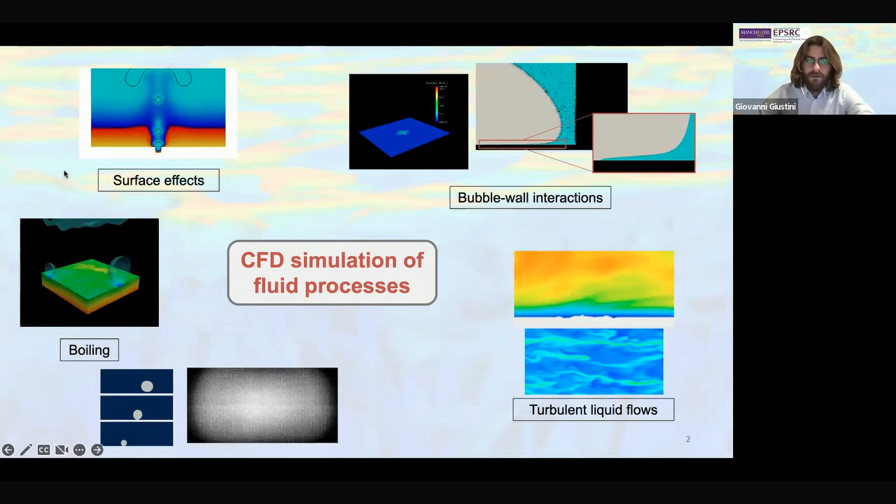So let me break down today's topic. First of all, I'd like to give you a bit of context and motivation behind my research and talk about the bigger picture of this kind of CFD modeling of boiling, especially as far as the energy sector is concerned. Then I'd like to show some results from my career so far.

Both are pertinent to the modeling of nucleate boiling phenomena, both during bubble growth and the formation of some liquid films beneath steam bubbles growing at a wall, but also some contribution in the area of boiling heat transfer.

And after that, there is going to be what, at least personally, I think is going to be the most interesting part of my talk, because I will show something that isn't really finished. Hopefully that will be a good opportunity for discussion. And eventually some very preliminary conclusions and the wrap up of our chat.

Now, boiling phenomena, as we know, are an integral part of energy systems. You just need to look at nuclear power plants, but in general, any power generation technology. Now that is rather clear to us in the multi-phase flow community, but outside of it, this isn't really appreciated. So a lot of academics coming from different backgrounds and doing different research, but still, for example, in energy systems, don't really appreciate the importance of boiling.

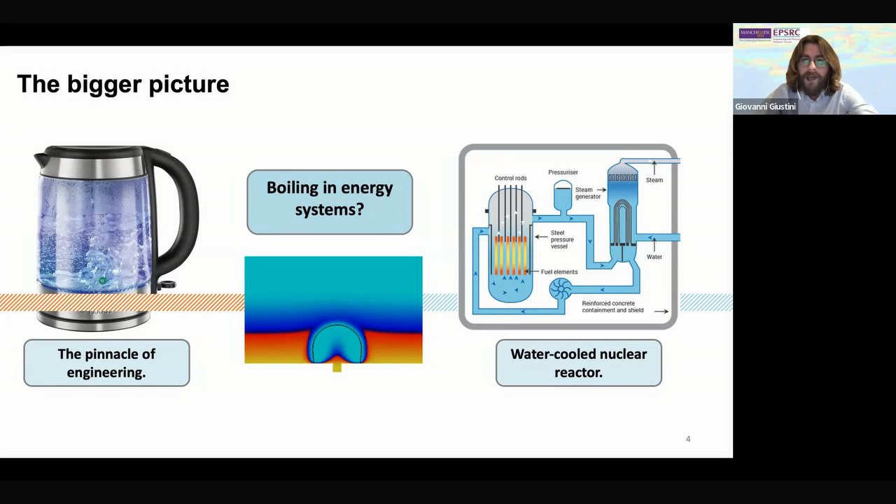So if we stick to nuclear, okay, maybe some nuclear people in the audience, yeah, okay, fine, but so why boiling in nuclear? Most of the reactors currently operating in the world are pressurized water reactors, PWR or PWRs. A PWR core works perfectly well with relatively fresh, not boiling, single-phase liquid water.

Well, yeah, in principle, yes. In practice, there is some boiling in a PWR core as well. No net vapor generation, but there is definitely boiling, and rather vigorous boiling, in the hot channel of a PWR.

And yet again, one may say, okay, fine, nuclear power, especially pressurized water reactor technology, has been around for ages, say 70 years, and we have been doing that without seemingly knowing anything about boiling. Safety seems to be guaranteed.

Well, yeah, that's exactly the problem. Safety seems to be guaranteed, but at what cost? So 70 years of increasingly expensive nuclear power, at least in the West. So the idea is that, okay, fine, one way to look at it is that maybe there is a lack of fundamental knowledge of the basic fluid processes, whether it's kettle boiling or nuclear reactor boiling - it's the same, still not very well understood. That is one of the causes of significant conservatism in analysis and design.

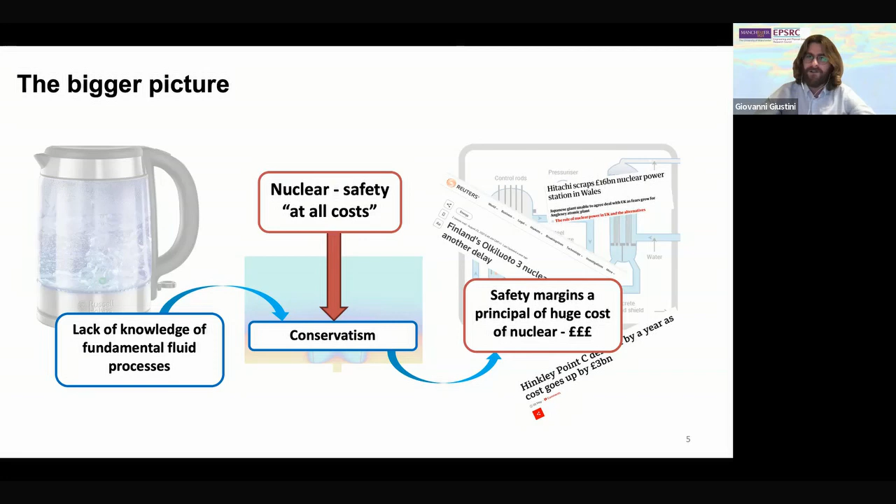So maybe it's not really boiling, maybe it's some other kind of consideration. Okay, that may be, but I'm a multi-phase guy, I do boiling. I think this rationale seems at least a plausible excuse to do some good science.

So what kind of good science do we want to do? My specialty is numerical simulation using techniques based on computational fluid dynamics. This is a high-profile research effort funded both by the UK taxpayer, via the Engineering and Physical Sciences Research Council, and by sponsors such as my main industry sponsor, Rolls-Royce Nuclear. The idea is that we combine very detailed, physically based fundamental simulation with experiments for verification and validation.

This gives us a good understanding of the basic processes involved in boiling: bubble growth, bubble departure, bubble rise, boiling heat transfer, and so on. With a combination of these two aspects, we can generate a decent amount of data to train the next generation of data-driven modeling for more accurate analysis - not really at the small scale of single bubbles, but more at the component scale, for example a nuclear fuel channel, or at the system scale of the core itself and the rest of the plant.

So the idea is that, as a consequence of all this number crunching and modeling of little bubbles, there would be a technological breakthrough enabling us to quantify fundamental fluid processes - not just boiling, but also single phase flow, turbulent heat transfer, and so on. So we generate and assimilate a sizable amount of high quality simulation data.

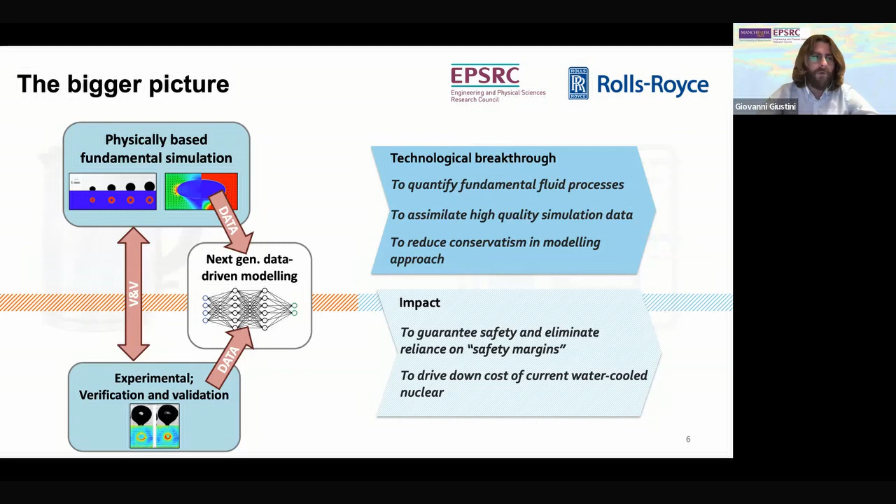Then, in other parts of the world, there are other considerations, and maybe this rationale wouldn't really apply. Now, where are we? We have an excuse to do something that I believe is interesting and can be, at the end of the day, an advancement of the state of the art in multi-phase flow and boiling.

What kind of weapons do we use to tackle these huge problems and fulfill this promise of learning a lot about boiling, especially in a nuclear context, and driving down the cost of nuclear? The kind of CFD that I use is maybe not the usual CFD we're accustomed to - I use interface resolving techniques for two-phase flow, called interface capturing methods.

The basic idea is that with these methods, we want to model the transition region between two fluids and approximate it on a finite volume numerical grid. For example, the interface can be the curved surface of a bubble growing at a heated wall. This is the methodology that underpins the physically based fundamental simulation that me and my coworkers use.

Now, these interface capturing methods are coupled with the ordinary CFD simulation methodology, the same that we use for flow of water in a pipe, an aerofoil, a Formula One car, and so on.

With this interface capturing, we can detect where the two phases, for example vapor and liquid, are, and what the interface is doing through time. As we can see from the image of this triangular mesh at the center of my slide, all the action is really in only a few cells where my liquid changes into vapor. So from the point of view of continuum mechanics, it's a waste, really.

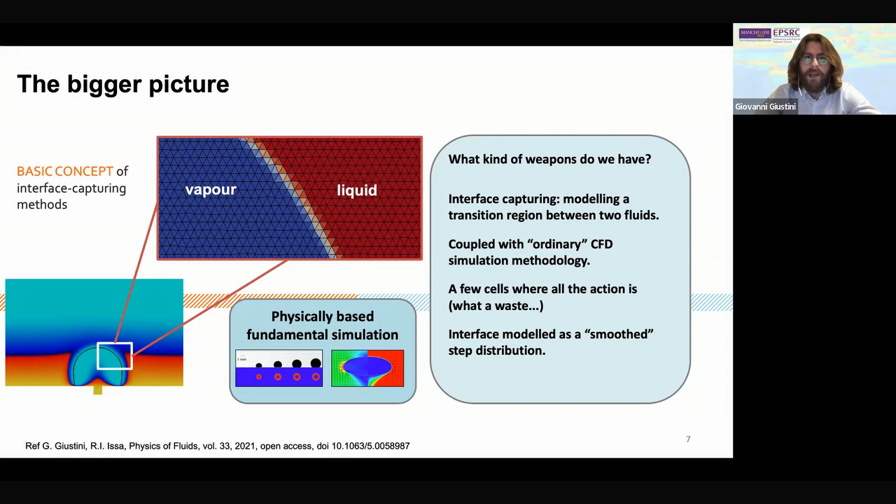I would like to start with the so-called micro layers. We would normally expect that in boiling of water at atmospheric pressure, the solid surface exposed to the vapor is exposed to the vapor inside the bubble. That's what we would expect. Well, things are not really this straightforward.

These images are from my coworkers in Korea, the group of Professor Hyungdae Kim. Here we're looking at a single bubble growing at a heated surface. The top row of images is the side view of the bubble, and the other two rows need a bit more interpretation.

The middle row of images represents an interferometric detection of liquid beneath the bubble. So there seems to be a liquid film beneath the bubble that, when we use interferometric measurement techniques, shows us an interference pattern, some fringes. This is at least what appears to be from experimental measurement.

Actually, some other measurements from the lab, the last row of images, this is an infrared measurement of the temperature distribution at the solid surface beneath the bubble. Red means hot, and then from yellow to green to blue, increasingly cold surface. Now there seems to be something.

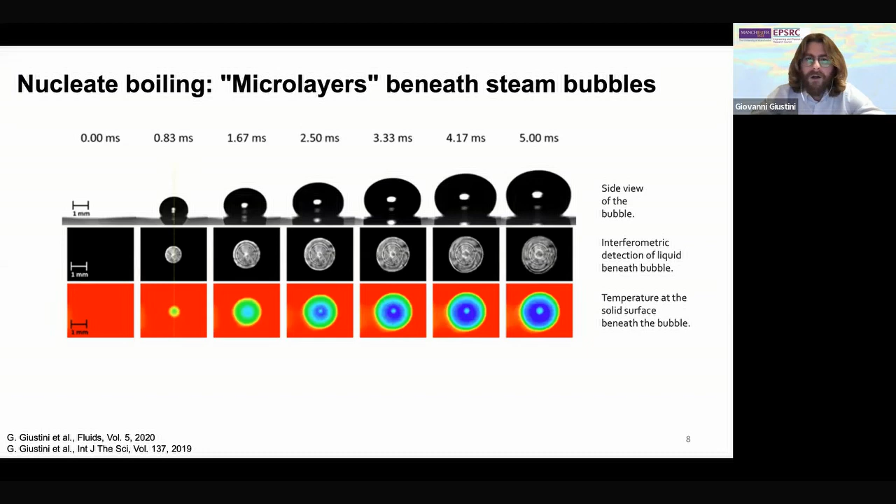There seems to be maybe some entity, possibly a liquid layer, or in any event something that is evaporating. We are relatively confident that what is evaporating is a very thin layer of liquid, the micro layer, that is left behind on the solid surface during the early stages of bubble growth, and then starts to evaporate, and eventually, when the bubble has grown up later on, disappears. But we'll get there in due course.

This is a sketch of what is likely to be the typical shape of a microlayer beneath a steam bubble. This is what we would see if we were some kind of Laplace demon sitting on the solid surface. Actually, we generated this image with computational fluid dynamics.

The important point to bear in mind is that these layers seem to be really, really thin. They are something like 5 microns in thickness, but they extend radially outwards from the center of the bubble base up to a few millimeters, so extremely shallow.

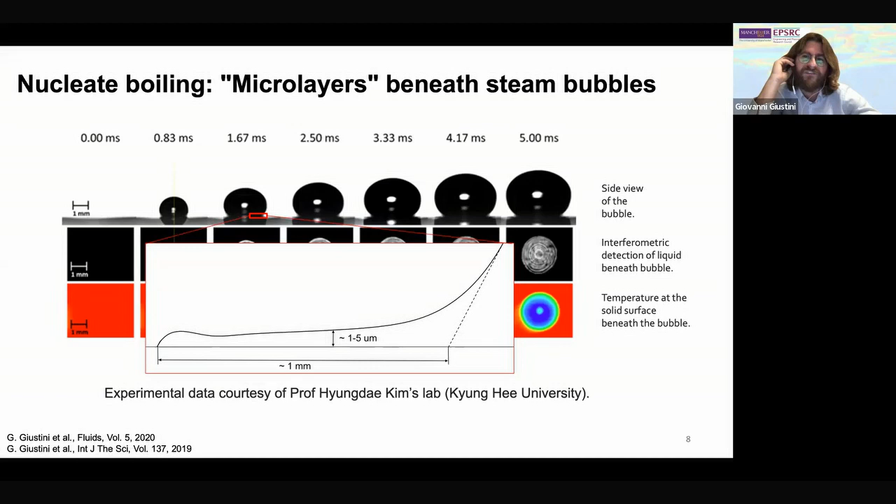This technique was pioneered at MIT using computational tools conceived for research. So me and coworkers, formerly at Imperial and now at the University of Manchester, are using a similar methodology, but implemented in more broadly applicable CFD toolboxes.

In these videos, we are seeing results of a hydrodynamic simulation of microlayer formation. The blue is the liquid, the white is the bubble, that is to say, the vapor. In the bigger video, I have included some arrows that represent velocity vectors at the interface and in the liquid, and the close-up represents the hydrodynamic process of microlayer formation from a qualitative point of view.

The important point here is that at the base of the bubble, there is indeed a point where the liquid ends and the vapor begins, if you can see my hand or arrow here. That's the inner root region of the microlayer. That is what in the academic community we call the triple contact line.

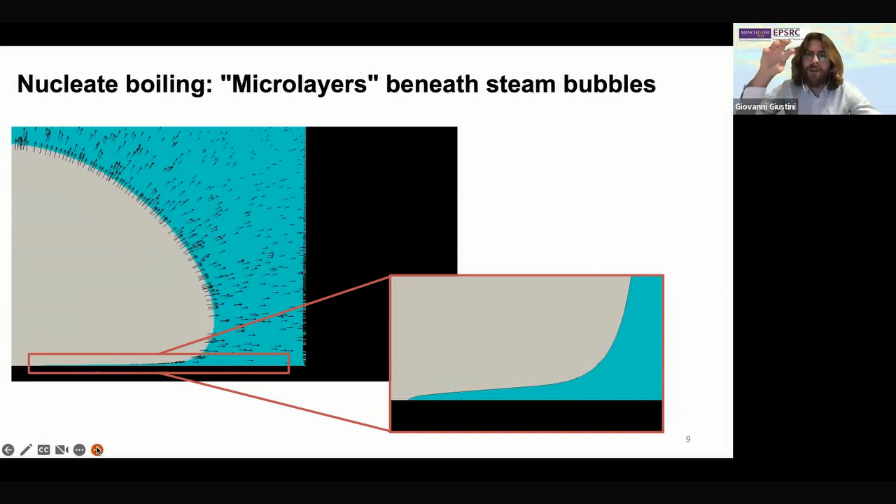With this trick of inflating a bubble artificially and then looking at the hydrodynamics, we can actually get some decent results when compared against the experiment, at least during the early stages of bubble growth.

So the idea is that we studied the hydrodynamics because we believe that the hydrodynamics-only simulation of a microlayer is representative of a very early stage during bubble growth, during which the layer hasn't had time to evaporate due to the transport of heat from the solid surface.

And here, just an example of the results that we can get. These two plots have been plotted at two different times into the simulation. The various lines are simulation results, and the black hollow squares are experimental data from Professor Kim's lab. And qualitatively, the agreement seems to be all right.

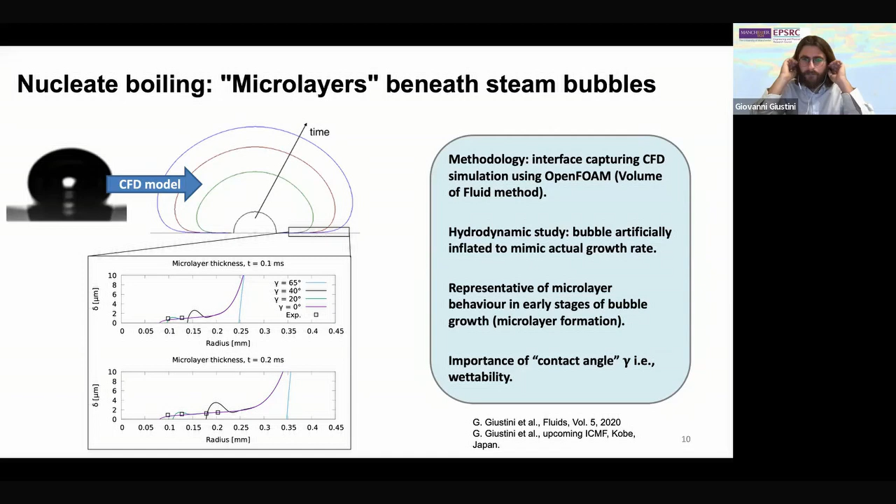Later on during bubble growth, of course, we know that a bubble grows at the surface during boiling, but eventually departs and goes into the liquid. And if we're looking at convective boiling, it is then advected away into the flow. Anyway, so the microlayer is not all that there is to say about boiling.

And there is another topic that I find particularly interesting, and I'm glad to be presenting some results to you about it. And that is the study of boiling heat transfer at bubble departure. So once the microlayer has formed, it has then evaporated, it's gone, it's disappeared. Well, there is still some time left in the life of a bubble before it departs from a surface.

Now, I like to call this the Griffith problem, in memoriam of the late Professor Griffith from MIT, who was the first to introduce and study the problem. And the idea is that we want to study what happens when a bubble departs in terms of quantifying the flow of heat to cold fluid attendant upon bubble departure.

And here the idea is that what we have at the surface is that first we have a bubble, then due to gravity, the bubble disappears from the surface, but the volume of space previously occupied by the bubble due to continuity needs to be replaced by something. And this something is the surrounding liquid.

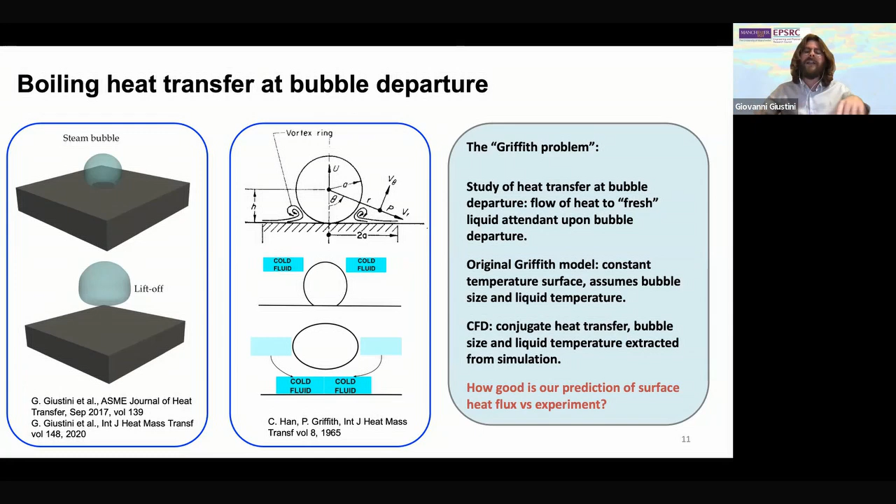And this is more or less what we get for this kind of problem. So this is a study both with CFD and with experiment of bubble growth and departure during pool boiling of water, in this case at atmospheric pressure.

Again, three rows of images. Top row is a side view of the bubble as modeled with CFD. Middle row is phase distribution on the heat transfer surface from CFD. The red ring is where basically the microlayer is before it evaporates.

Too long to go into details, but in this particular simulation, we are not really resolving the microlayer with a computational grid. There is an algebraic offline model that takes care of it. But the bottom line is that once this model decides that there is no more microlayer, then the behavior of the bubble at its base is handed over back to the CFD, so it's again fully resolved by the computational grid and fully mechanistic.

The last row of images is again the interferometric measurement, from our colleagues from Korea, that shows initially a fringe pattern, so presence of the liquid, but eventually the disappearance of the liquid.

So after the vertical solid line, what both experiment and CFD simulation tell us is that at the base of the bubble, there is a broadly circular area of solid surface which is exposed to the vapor in the interior of the bubble. And as the bubble is departing, this approximately circular dry patch is shrinking, and as it does so, there is an advancing liquid front that re-wets the previously dry patch, likely giving rise to heat transfer from the solid surface to the fluid.

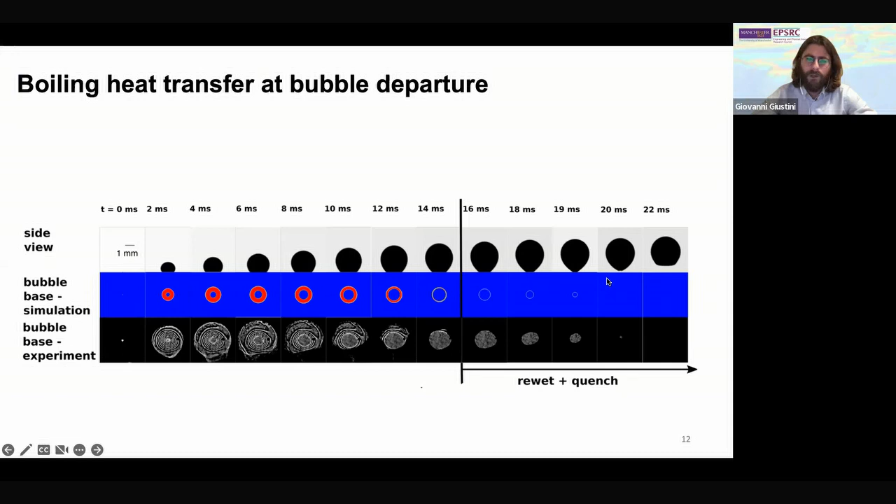And again, from the lab, we do indeed have direct measurements of the heat flux, of the planar distribution of the heat flux at the solid surface beneath the bubble, without going into details about the experimental technique used by our colleagues.

The bottom line is that from direct measurements of the temperature of the solid surface, we can actually reconstruct the corresponding heat flux on the solid side of the heated surface, and from that we can extract radial or transversal profiles of the heat flux at the solid surface, looking at the images on the left, both during this liquid re-wet process and also during the subsequent post-departure quenching process.

And give or take, what happens is that the magnitude of the flow of heat can be initially quite considerable. We have something like 150 kilowatts per square meter, which is not as bad a heat flux, which then decreases with time.

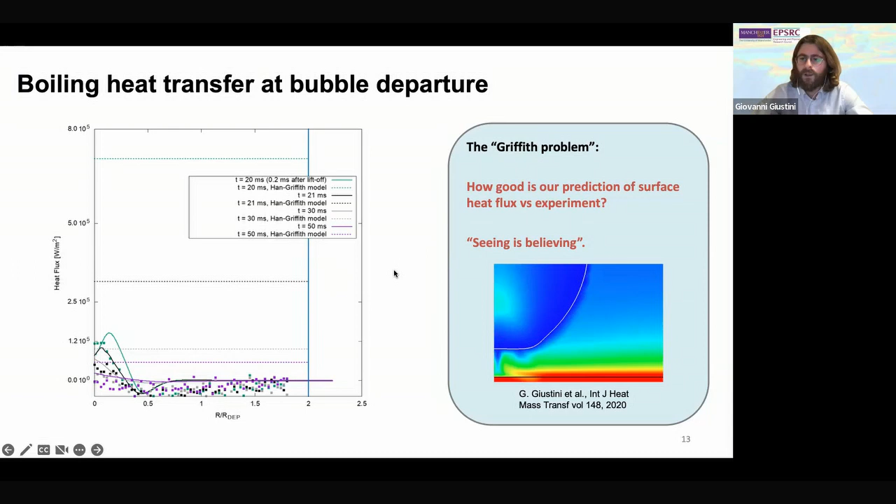So qualitative physical phenomena originally postulated with a pen and paper analytical heat transfer model could be confirmed with CFD, which to my mind is a rather compelling evidence of the power of present-day CFD with interface capturing in tackling these kinds of problems. Now, these are not the only problems that we are looking at.

There are other activities going on, and I'm beginning to realize that I do not have much time, so I'm going to rush, but I hope that I won't leave out too many important details.

Now, another open challenge in modeling that I'm very interested in is that of microlayer evaporation. So let's recap a little bit what's the situation right now. From a modeling standpoint, thanks to a sustained effort over quite a few years, I mentioned earlier work at MIT, but the problem was tackled also by some colleagues of mine at Imperial College London.

So the thing is that the microlayer is evaporating more or less as it forms. It also evaporates on a solid surface. And proof is the temperature distribution at the solid beneath the microlayer. So we have a ring-shaped temperature distribution with a cold ring-shaped solid region, which is suggestive that this layer is sucking heat from the surface because it's evaporating.

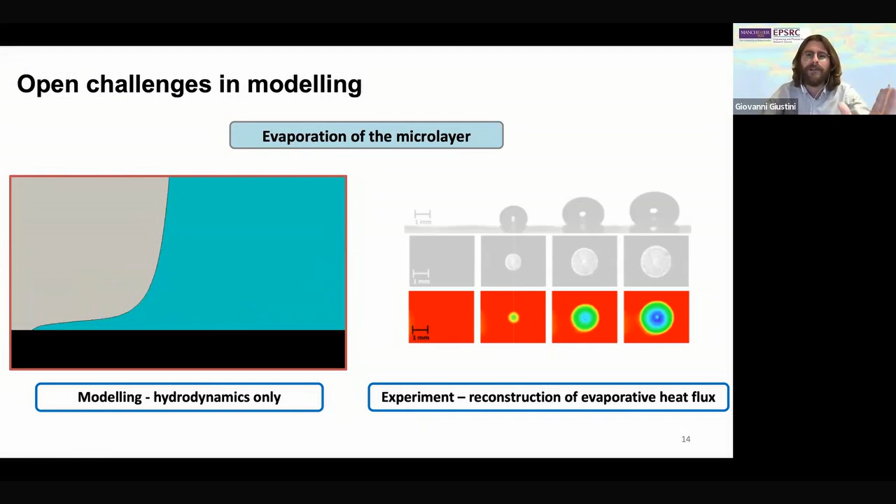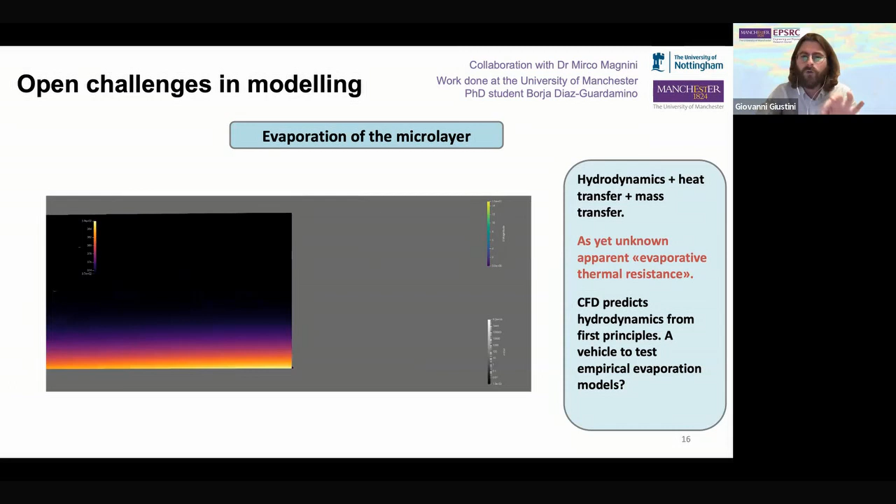By tracking, I mean that we can look at the bubble as it grows on the surface. We can model the hydrodynamics of the microlayer. So via tuning the various empirical constants that appear in our very approximate evaporation models, we can actually get a ballpark estimate of what are likely the evaporative heat transfer coefficients, both at the curved surface and at the microlayer, that give us good agreement with experiment. And that at least gives us some more indications of what could be the likely cause of the anomaly that we just saw in microlayer evaporation.

And so this is again a close-up of microlayer formation and evaporation using CFD. The black line is again the solid-fluid interface. So we're doing conjugate transfer. We are actually resolving the temperature distribution in the liquid around the bubble, but also in the layer itself and in the region where the layer is just beginning to appear.

So early days, and we're talking about simulations that, luckily, we can assume our bubbles are rotationally symmetric, so we can use two-dimensional axisymmetric simulation. Nevertheless, we have many cells, and due to some numerical restrictions on the values of the time step, we need to use very small time steps. So at the end of the day, these otherwise not too heavy CFD simulations are not so quick to run.

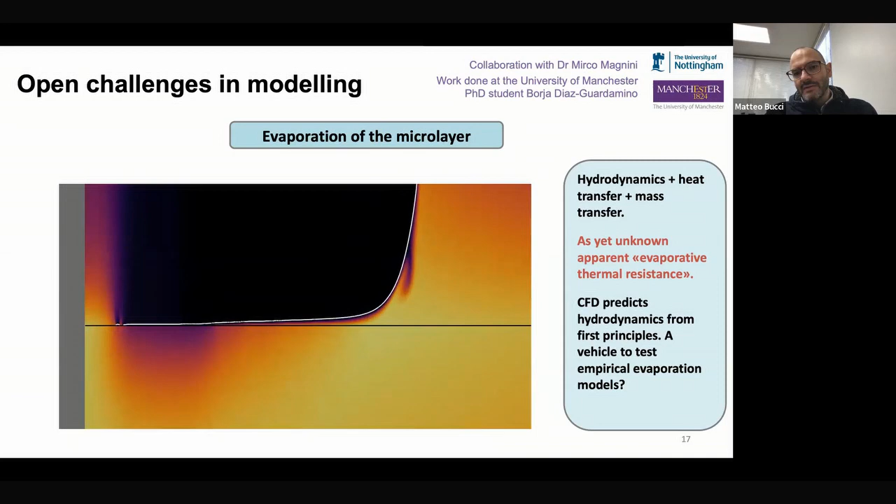Thanks, Matteo. Okay, another aspect we're looking at right now is actually flow boiling in subcooled conditions, when the liquid is a bit colder than saturation temperature. Here is work again in collaboration with Korea, and these are preliminary results. We are running CFD in conditions of a recent set of measurements where we are looking at single bubble behavior in flow boiling in subcooled conditions in a mini channel with X-ray. So here we can't see very well, but there is a little ghost of a bubble measured, and its appearance is detected with X-rays.

So here there are basically two research questions that we're after. First of all, we need correlations to capture evaporation at the surface of a bubble. But does the model that we have for evaporation work also for condensation? We don't know, we're trying to find out. And likewise, wettability and likely values of the contact angle of the surface seem to be again important in determining bubble behavior.

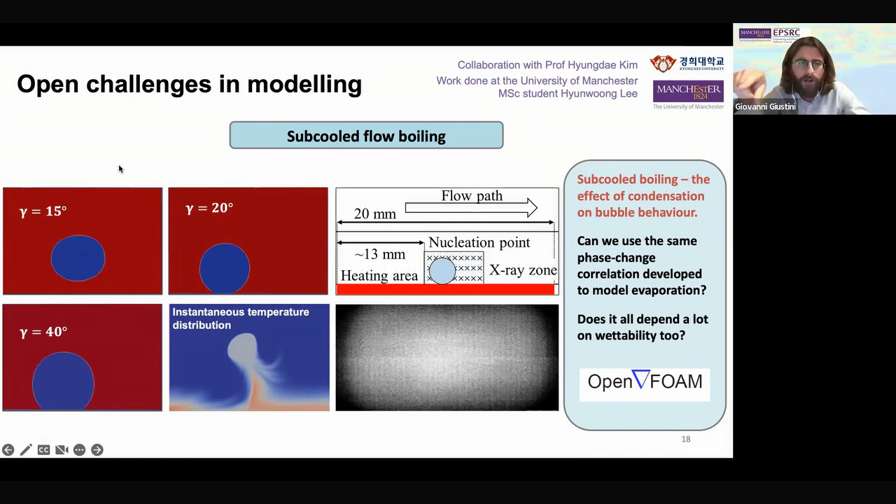And lastly, what we have seen so far is actually simulation on rather simple geometries, without taking into account surface features. However, we know that in boiling, surface features are important. There is this story that we need a cavity or a notch on a heated surface to initiate and sustain boiling at ordinary temperatures. Here, in reality, we are looking at bubble growth at cavities that are a bit larger than the cavities I just mentioned. I can't give the exact numerical details of what kind of cavities we are looking at, as there is involvement of an industrial sponsor in these kinds of projects.

But anyway, the bottom line is, let's take our interface-capturing CFD methodology and try to implement it in general applicable open source toolboxes such as OpenFOAM, so simulation on arbitrary meshes to tackle boiling problems on arbitrary geometries. So far we got to the stage where we could validate the methodology using standard test cases for free bubble growth and rise away from surfaces, and using the same CFD methodology, we then used it for bubble growth at a cavity or at a notch.

We got rather reassuring results in terms of bubble radius versus time for a rising bubble, provided that we use rather fine meshes. We're talking about millimetric bubbles, and we need to resolve everything with meshes with cells that are something like a few microns in size. So again, numerical challenges. And all this is to look at wall boiling in the presence of a surface structure.

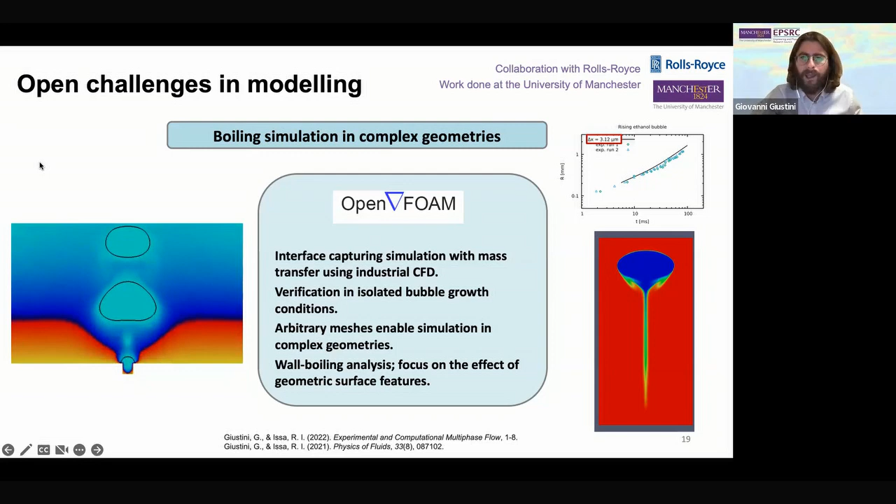And then with that, yeah, 45 minutes. I think I've been going on for long enough. Any questions?

Okay, I would summarize what I have just said in the following way. I hope that I have given an indication that we can use computational fluid dynamics to support industrial applications such as thermal hydraulics and boiling for nuclear power, industrial applications that rely on boiling. We can indeed model in detail key local physical phenomena during boiling at the surface. And for applications, we can explore the effect of parameters believed to be important in certain applications of boiling.

And here I made an example. We have an interest in surface structure for nuclear applications, and we use CFD for that. And with this, I shut up.

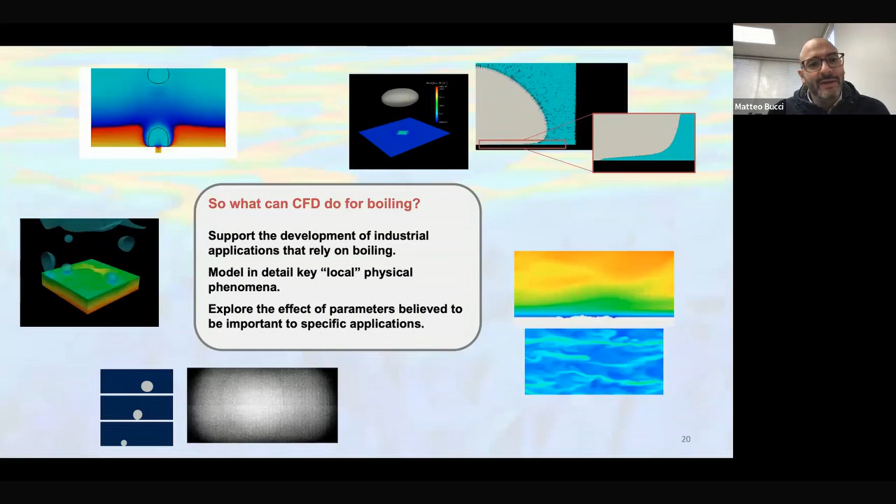Sorry, I'm a bit late. Delighted to take any questions. Thank you very much, Giovanni. Really insightful presentation, and I'll open up to questions. I see already that Saeed has his hands raised. I suppose you have questions, Saeed?

Yes, Giovanni, my experimental results that involve direct measurement of the heat flux when the microlayer forms is very much consistent with your simulations. I even back calculated using Matteo's approach. Can I share just one graph with you?

Yeah, of course. So this is the graph. Basically, these are sensors that I can show you that directly measure the heat flux at the interface, and this is due to microlayer evaporation, and the heat flux that it generates is much higher than the average heat flux, as well as the heat flux due to liquid rewetting.

So I'm a little bit surprised with some of the experimental results that you were comparing with other groups. There is no physical phenomena that impedes evaporation, and actually when we back calculated the thickness, we came down to 3 to 5 micron, which is very consistent with some of the other numerical results that you showed. And there is no phenomena that impedes that evaporation until you maybe go to nanometers.

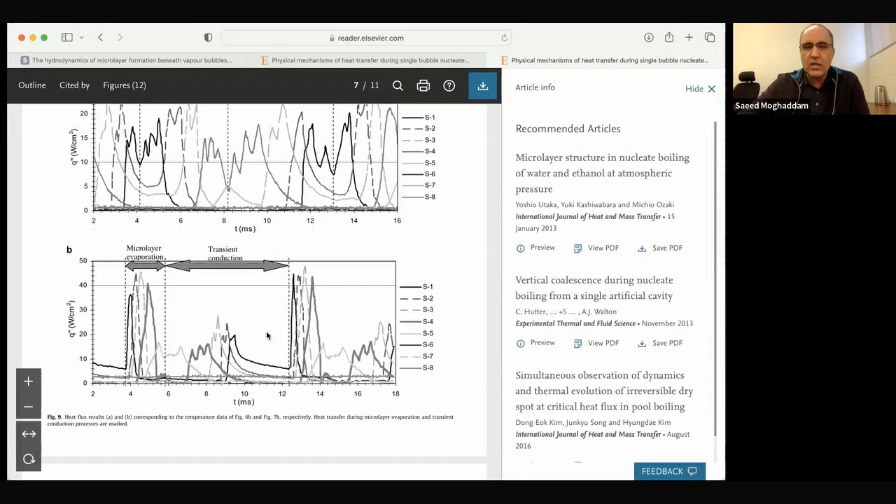And the measurement was done through these multi-layer temperature sensors, radially. Basically heat goes through these and we measure the delta T and heat flux. So I thought that your numerical results are spot on. Okay, thank you, yeah thanks. Looks good. Maybe the fluid is different, but on a computer, we can change the fluid easily.

To follow up on Saeed's question, if you look at the evaporation coefficient, I think that's where most of the empiricism is at this point, right? Because you have experiments that give you values that are 1, 2, and even 3 orders of magnitude smaller compared to molecular dynamics.

And I honestly, as an experimentalist, have serious doubt that the infrared experiments conducted by myself as well have the precision to make that measurement. At least in the kind of experiment you mentioned, a nucleate boiling with very, very short time scale and length scale. But it's indeed a very open question.

So the question I have for you, Giovanni, very quickly is, what sensitivity do you have to the evaporation coefficient? Huge. So that confirms exactly what you have just said, and I believe we either believe the experiment or we believe the theory. I am a modeler, so I should believe the theory, but I always believe the experiment. So again, there's a quandary again, but yeah, there is a huge sensitivity.